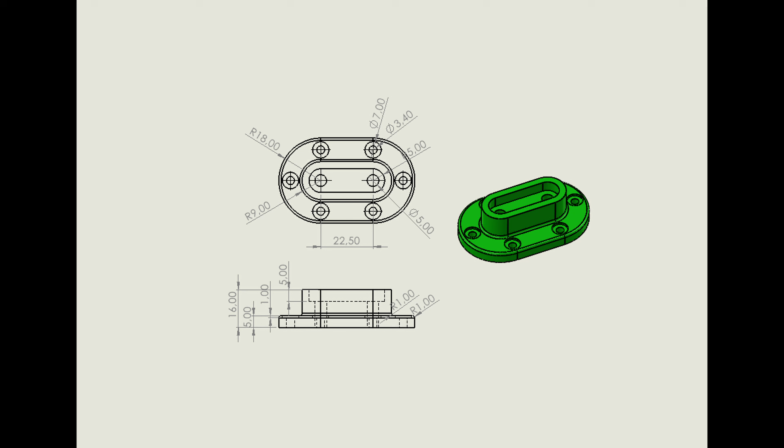In this lesson, we will model the shape shown in the visual and learn two new commands, pattern and mirror in sketch mode. Let's begin by creating the base of our model.

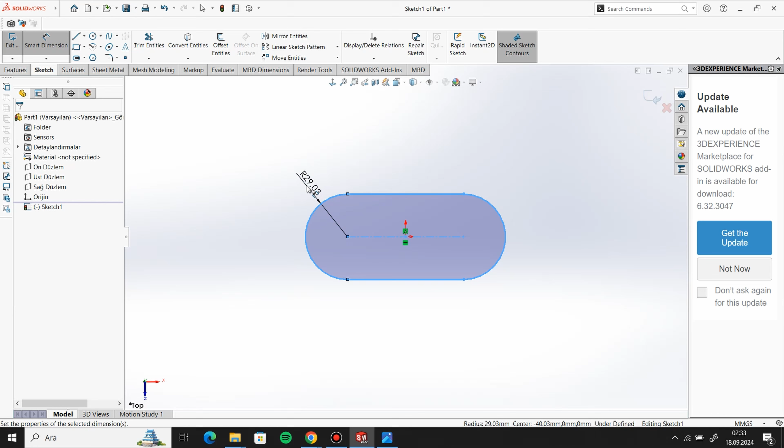I start a sketch on the top plane and click on the straight slot command, starting the sketch from the origin. After dimensioning it, I use the extruded base command to give the sketch volume.

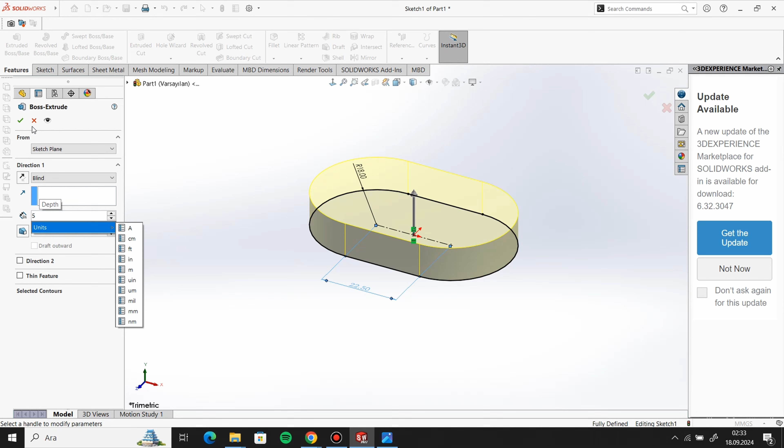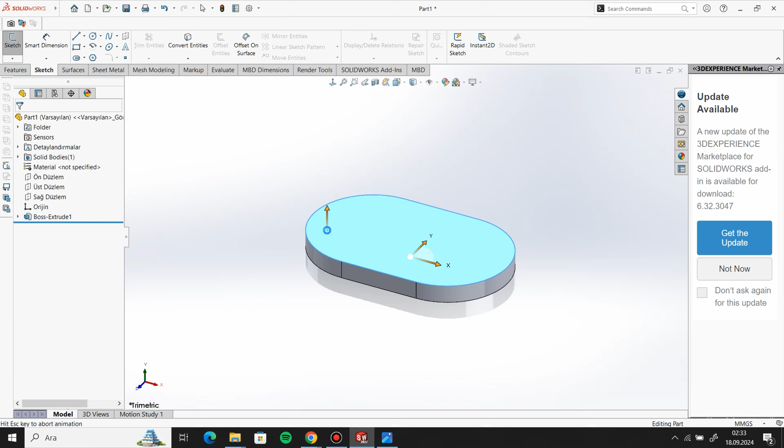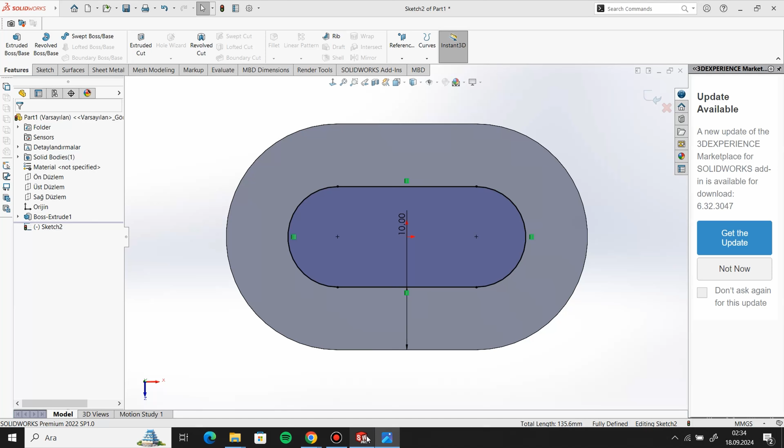Now we will work on the upper part. I open a sketch and select the top surface of the model. Using the offset command, I offset the lines inward by the required amount. Then, I use extruded base to add volume again.

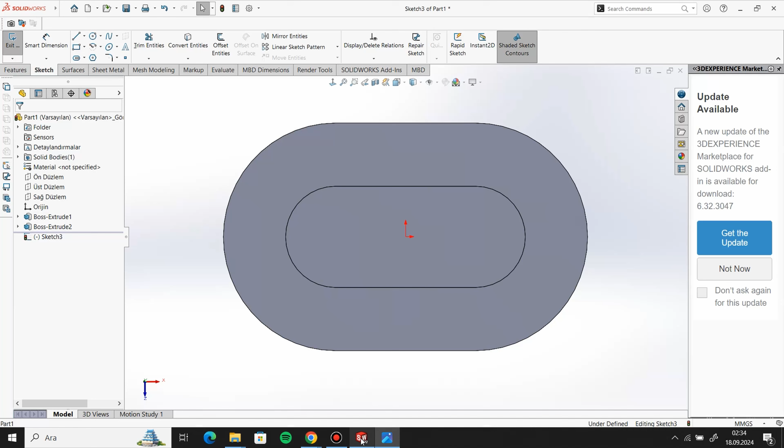Next, I open a sketch on the top plane and use the offset command to move the lines inward. I use extruded cut to create the cutout.

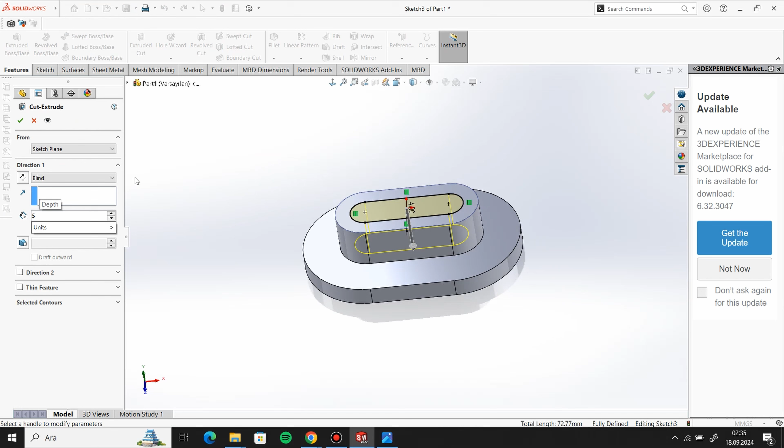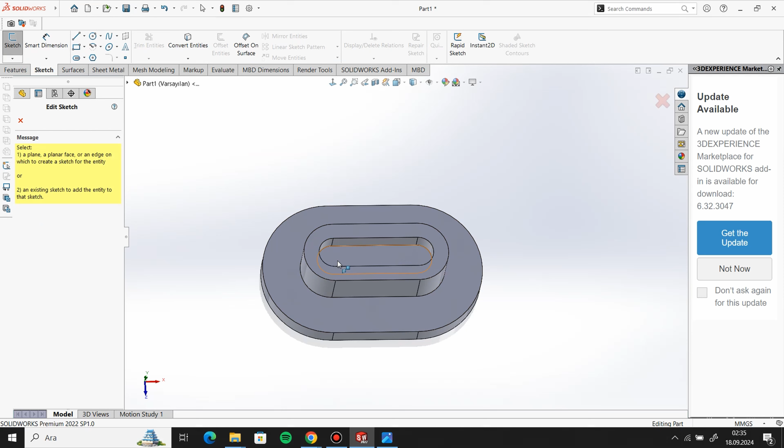For the center holes, I start a sketch on the appropriate surface. I draw the circles, dimension them, and use extruded cut to create the complete holes.

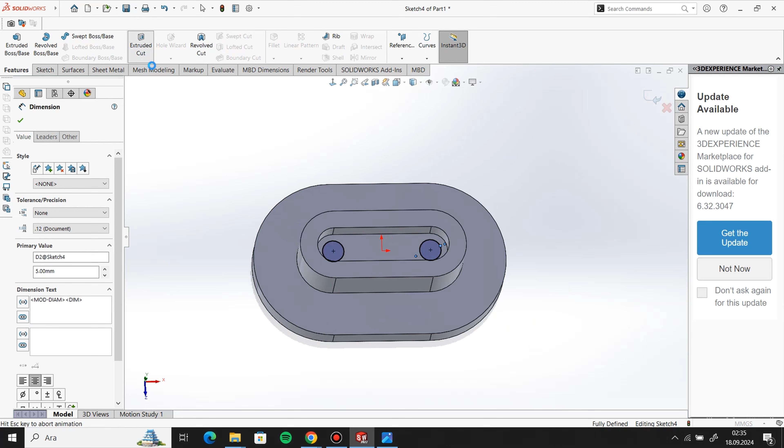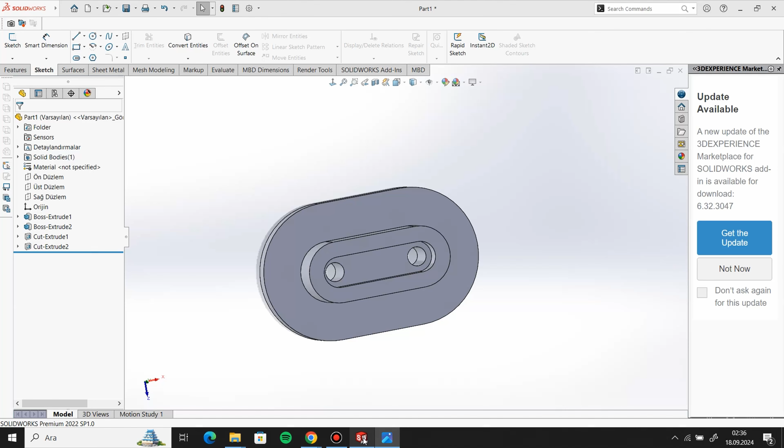Now, let's make the surrounding holes. I open a sketch on the appropriate surface and use offset to find the center of the hole based on the radius.

I draw the circle, dimension it, and use the circular pattern command to duplicate the circle.

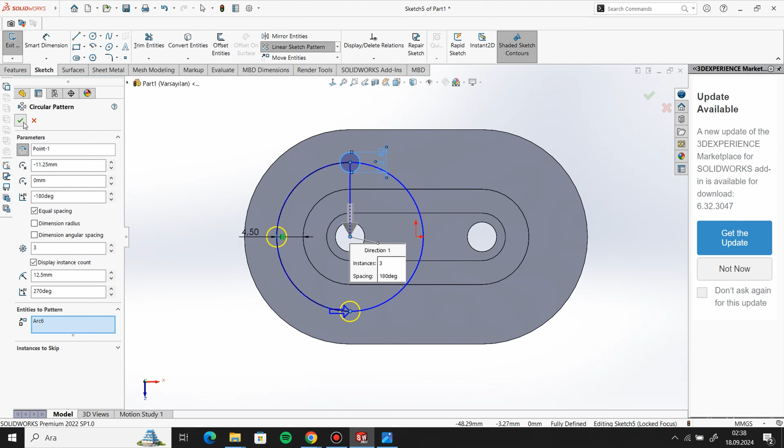Then, I use the mirror command to mirror it along the right plane. After that, I use extruded cut to create the complete holes.

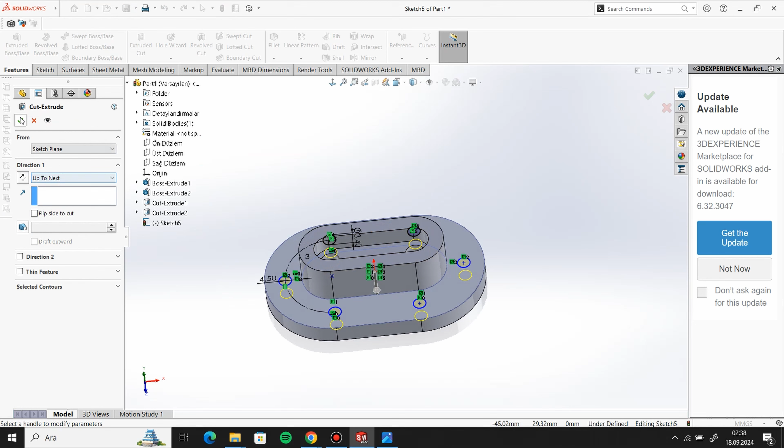Next, we'll add the indentations around the holes. I open a sketch on the appropriate plane, draw the circle, and dimension it. I use circular pattern to duplicate it again and mirror it.

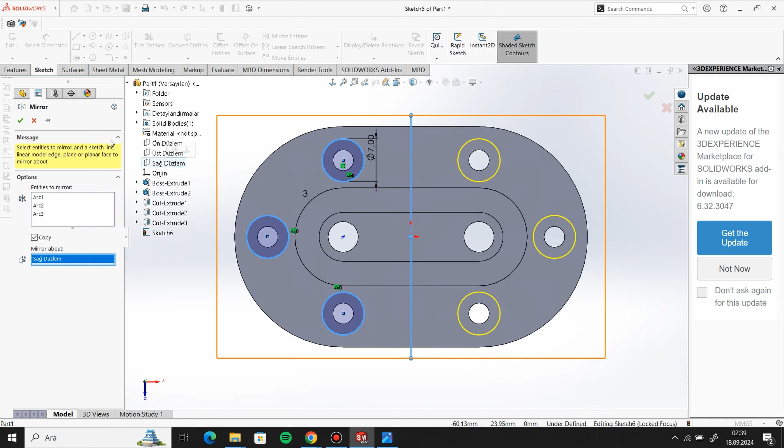Then, I use extruded cut to create the indentation.

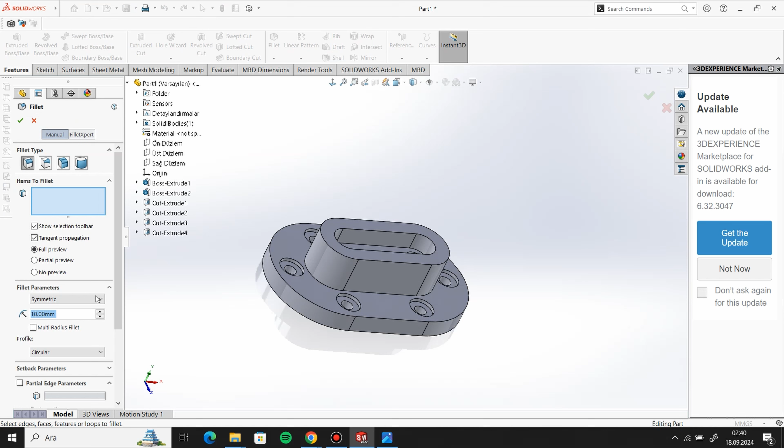Finally, I use the fillet command to round off the edges with the appropriate radius. Our model is now complete.